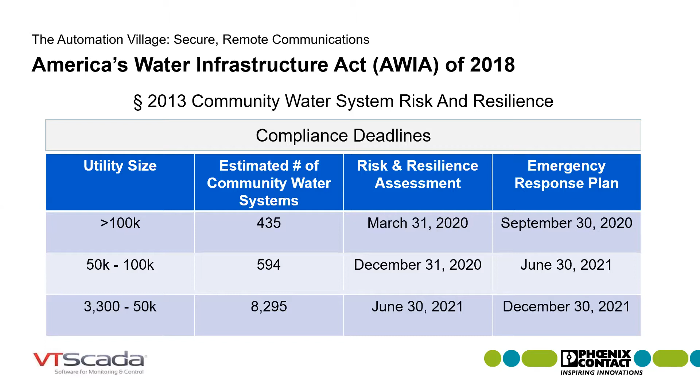But getting into the verbiage that we have as far as what AWIA actually requires, I'd like to highlight a couple of key definitions because this really comes into play. Resilience, that is the key word for our industry today.

And you see the definition as it's laid out in the legislation. I'll give you a simpler one. Resilience is how big of a hit can you take and how quickly can you recover.

The next key definition there talks about hazards. And this comes up in the conversation because we're talking about all hazards, whether that is a natural hazard or a malevolent one.

Obviously, we know what a natural hazard is, but the legislation does spell out some of these definitions so that we understand exactly what it is that we're trying to address.

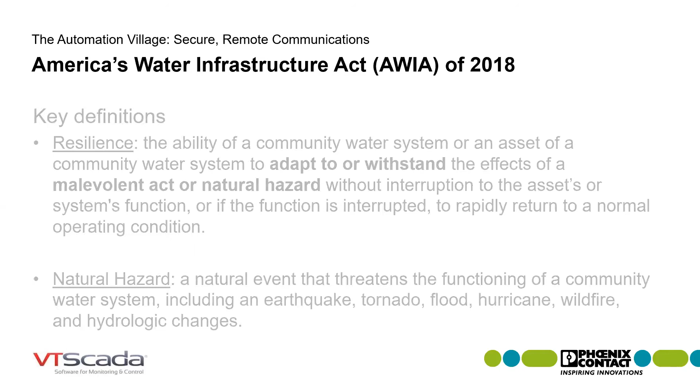In this next slide, we see some details around the risk and resilience assessment. Let's hit this first bullet point. The things I've put in bold are relevant to our conversation today. We want to assess the risk to a system from both a malevolent act, something that is intended, as well as natural hazards. The goal is protection of critical infrastructure, and whether it's a natural act or an intended act by a threat actor, we want to make sure the resilience of the system can hold up to that.

Our next point is we're looking at the resilience of a variety of things, but I've highlighted key features. We're looking at the resilience of electronic, computer, or automated systems controlling these processes, and that includes the security of such systems. For the first time, we've got specific requirements around our SCADA systems or process control systems, whatever term we use, but that's in play now. We're also looking at the monitoring practices of the system - how we determine something's going on, and how we respond to that.

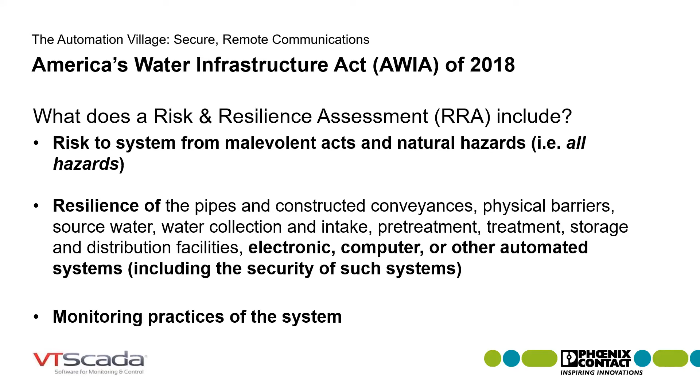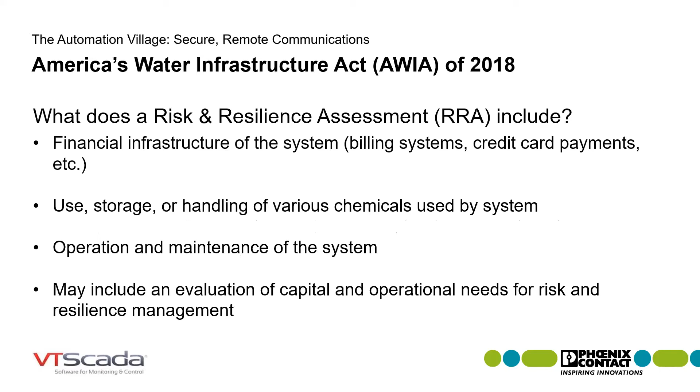In this next slide, we'll continue with some key points that come up. You'll notice they're not in bold, so I want to point out that is some of the real verbiage that goes into the legislation - not important for this conversation, but I thought it might be good for you to know.

Moving on to our emergency response plans - what's included there? You see some keywords: it could be strategies, resources, equipment, whatever that may be, but we're looking at how all these things play into the resiliency of your system. For the first time in legislation, it's looking at security, both physical security and cybersecurity. So that's why I think this conversation today is relevant. We now have specific directives for the first time in our industry relating to cybersecurity and what that means for drinking water utilities. You'll also notice another point about how we can identify equipment that can be used in the event of some type of hazard taking place.

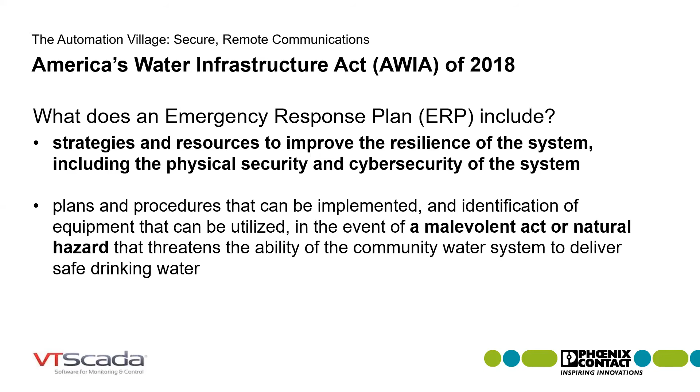On our next slide, again here's some key ones: what are the actions, procedures, or equipment that we can use to significantly lessen the impact? What they're really saying is, how do we detect that something's going on, how do we respond so we can mitigate that event as early and quickly as possible to minimize damage to our systems? And finally, what can we use in the detection of something going on that could impact the resiliency of our system and threaten the security of critical systems?

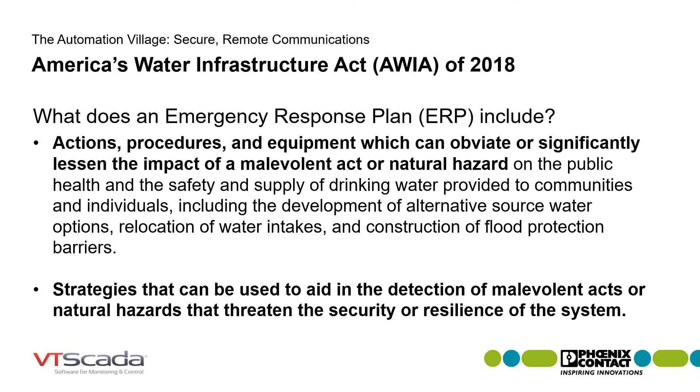Now, that's verbiage from legislation - very big picture, that may or may not mean much to any of us. I thought a better way to start narrowing down our conversation is to take a look at the NIST cybersecurity framework. That really has been driving the conversation on cybersecurity for critical infrastructure for the last several years. I like the core portion of the framework because it really helps define the key areas of cybersecurity we need to be focusing on.

So as we define the tasks ahead of us to reach specific goals, these five categories are: identify, protect, detect, respond, and recover. I think, as Miriam will tell you, nearly all of the conversation around cybersecurity focuses on the protection side, which makes sense, does it not? We're trying to prevent something from happening. But when you're dealing with critical infrastructure, we know things do happen, whether that's a natural hazard impacting our system or an intended attack. Either way, we've got to understand how we detect what's going on, how we respond, and more importantly, how we move to that recovery process.

And I think the key message I'd like for you to leave with today is we've got to start thinking about going beyond protection and into the other phases, because that really is what defines resiliency of our critical infrastructure, drinking water and wastewater treatment. So Miriam, I've been talking about some very big picture topics here, starting to bring that down into a few more defined categories around cybersecurity.

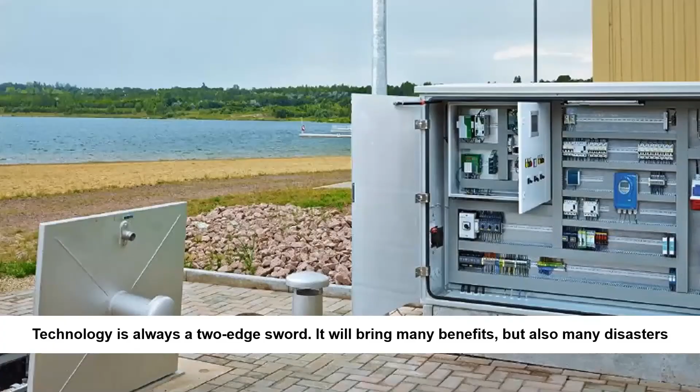Technology. So when we talk cybersecurity, this is where we spend most of our time, most of our resources. Everything we do around the first steps in cybersecurity, this is where we focus. This is where we're going to be focusing most of our time. However, my message here is exactly what it says: you have the technology that is working out there, however, it is a two-edged sword. It can bring many benefits, and that's why we want it, right? That's the idea of IIoT.

We have the technology, we have the devices that give us the data, but you need to properly use that technology, and especially the security controls within the different technologies, to be able to avoid any type of disaster.

We are going to be talking about Phoenix Contact technology in different layers, multiple levels within a plant, or the remote connectivity, in the next coming slides. And the last one is the risks, right?

How to manage risks. Creating a defense in depth strategy might sound overwhelming at first, but it doesn't have to be. So my message is: keep calm and just wash your hands. And what do I mean with this?

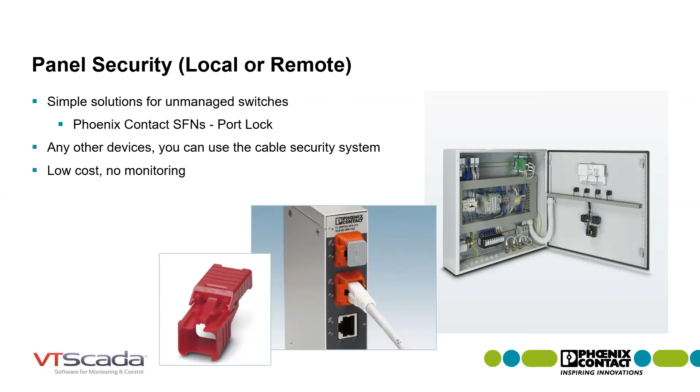Somebody has to have a secondary key to let you into a specific port if you want an engineer or technician to be able to connect physically to that specific panel, which I personally don't see the need for.

Now, moving on, this is where the meat of the cybersecurity information starts. Monitoring your network starts with a managed switch. You could use the embedded security features that the majority of managed switches already have, that is enabling or disabling the ports you are using or not using. So if anybody actually gets into that cabinet, you can just have the ports disabled and nobody will be able to log in or connect to that specific switch.

The additional security to that, because you could easily say well, you can unplug one of the other 3 devices in the case of this specific picture and just plug your laptop or your device in, is port security for MAC. You can tell that switch that only this specific MAC address is allowed to talk through port 3, which is great.

And if that happens, the great thing about managed switches is the monitoring. You can have that switch sending logs, sending network data, saying somebody just unplugged this and plugged in a different MAC address, and send it to some type of security SCADA monitoring system. That's where it's going to give you all the alarms and everything.

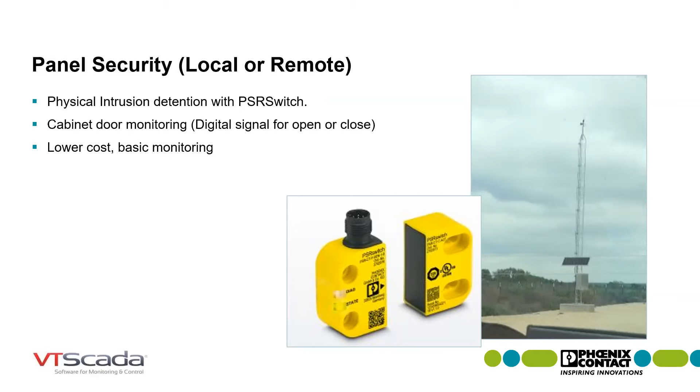And then additionally, going a little bit ahead, there's video surveillance. This could apply for local security at the plant level, inside the fence, and even if you want to move to remote sites, you can have some type of visual security system there too.

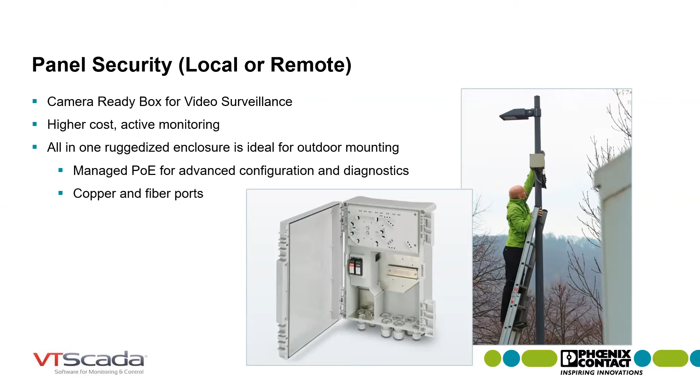Now, we talked about specific panel security and a couple of things you should or could be doing right now. What else can we do, and what other technologies are we using? How do we connect those camera ready boxes? How do we connect that safety sensor? How do we connect all of those devices that will send active monitoring data back into our central SCADA, or the specific PLC, or the specific process data back into our central SCADA or security operating SCADA site?

One of the technologies used the most is WLAN technology, wireless LAN. It's nothing more than Wi-Fi. It exists on the industrial side. However, the range fits within about 1,000 feet, so you have to think about it more like an in-plant type of thing.

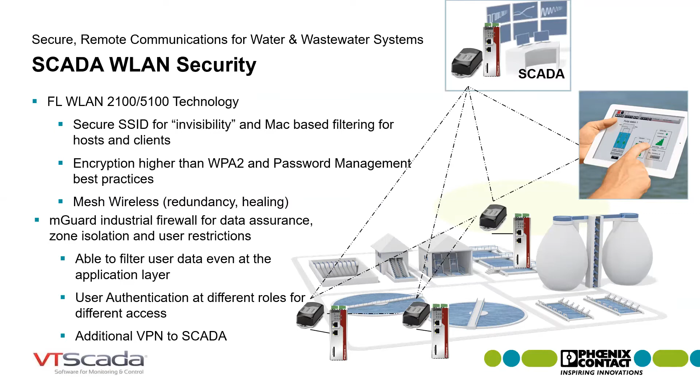Now, another technology that gets used a lot in the industry is trusted wireless. It kind of goes very close to standard WLAN, just a little bit further. The range is up to 20 miles, and we have ways to have flexible network structures, like point-to-point, star, or repeater.

The idea is to connect those more remote sites with some type of radio, trusted wireless radios. It self-organizes and self-heals, which brings resiliency. So if one radio communication goes down, the other one allows you to pick it up because it's just going to go around it. And it is hot swappable.

It's proprietary frequency hopping technology, or you can get a unique ID for that mesh or communication in the wireless via a config stick, what we call a conf stick. It's an additional part number. You plug it in on all your devices, and they will have that unique network ID to connect and talk to each other.

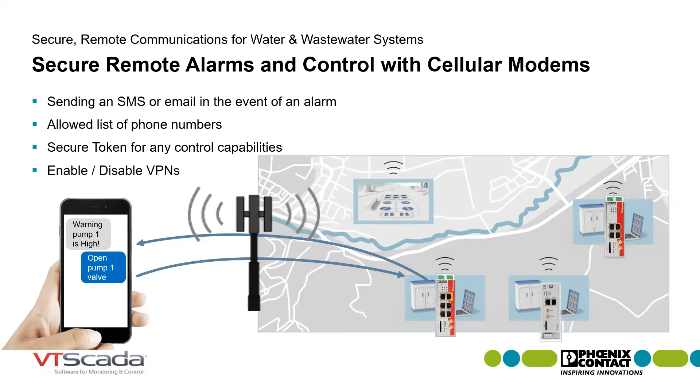You can also use the VPN for the cellular side to come in, all of these working together. You can even use the text message capability to enable and disable the VPN of those remote sites. So if you don't want it enabled at all times, you can have it disabled, send a text message—hey, turn on my VPN—turn it on, send the data back to SCADA, then turn it back off whenever it's needed.

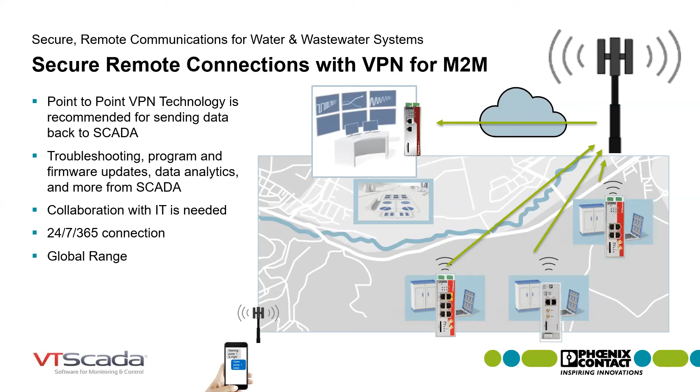Now, this is what we call machine-to-machine communication. What happens when you need users to connect in, to troubleshoot, either system integrators or vendors that need to come into those remote sites?

You can use a service like the MGuard Secure Cloud that we offer. It's very nice and granular because it provides the configuration, the tunnel, a unique encryption, a unique certificate for your specific account. Then, moving on, you can have user restrictions, so only the system integrators will be able to see the specific equipment that they provided. You can even be granular down to the device level—they can only see the specific device you want them to see, which is pretty nice. It makes it a little easier to manage and automate.

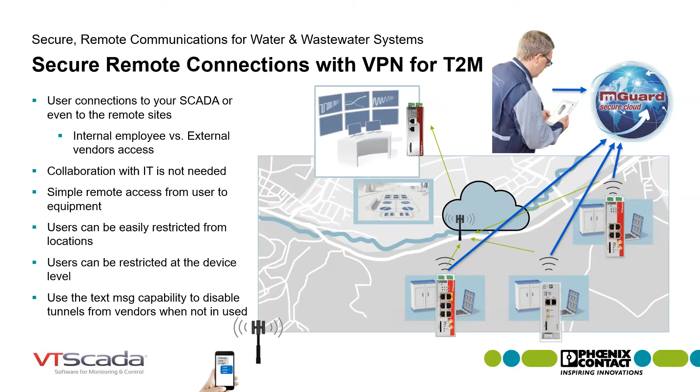Now, network resiliency, right? Network redundancy. How do you do network redundancy within these types of applications with really remote sites? They might be within wireless range, like Ethernet wireless range, but I also want redundancy. You could use the same cellular modem with the radio, or with trusted wireless radios.

As you can see on the MGuard device, the red line across, it has a couple of interfaces. A WAN interface will be, for example, your wireless interface—that's what sends the VPN back to SCADA. So all the VPNs, either to SCADA or to the remote user, connect through there. But if that radio has some type of miscommunication, the cellular connection will be allowed to kick in as redundancy and backup into your SCADA, back into your plant, again increasing resiliency within that remote site.

Now, something nice that we have to offer, and actually pretty popular with everybody in the industry, including system integrators—we use it ourselves when we need remote support. This is what we call the M2M box, remote connectivity in a box, ready to ship. It's one part number, depending on the application and what you need to do, with different devices.

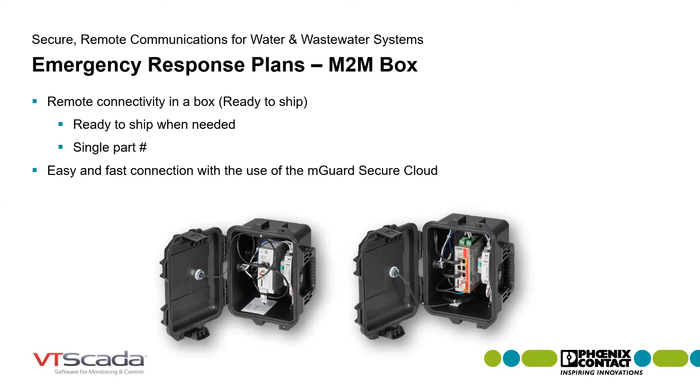The last thing to keep in mind is that you're not alone. You have trusted partners you can work with, and even at the vendor side, like us, we can work with your trusted partners, or work directly with you for all your industrial security and networking services. We have an engineering services team that can handle evaluation and planning, implementations and documentation, following security standards, maintenance and support, awareness seminars, and product training, depending on your exact requirements and applications.

To close my point, remote connectivity in water and wastewater is not a new term. Because of the nature of the decentralized infrastructure, we always have to find ways to bring the data in. Now time has passed, and we need to make sure we make those connections more secure and more reliable, because the entire operation depends on it.

Lastly, to close this session, this year has shown us that things happen. They can easily disrupt the ways we run our lives and businesses, and there's no real way to control them. However, they can be managed. My point stays: control what you can with the ideas I just provided, but manage what you can't. Active monitoring is part of managing what you can. Risk management is part of managing what you can. Do not let any malicious act or incident affect the availability, reliability, or overall resilience of your network. So take security as a holistic approach. Follow the guidelines provided, train employees, and collaborate internally to apply these multiple layers of defense. Know that you're not alone.

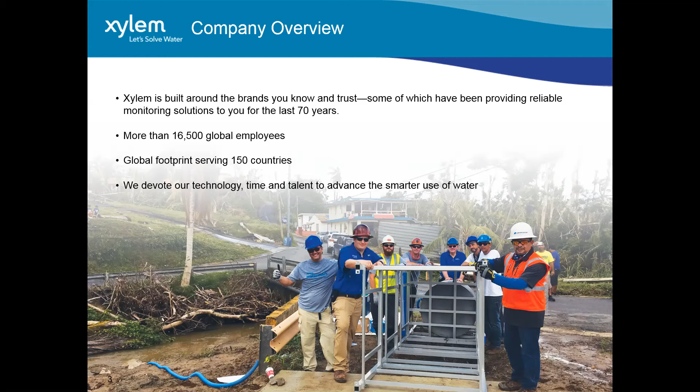Okay, so if we look at Xylem as a company, we're built out around almost 100 different brands located all over the world. We've been doing monitoring solutions for 70 years. We get involved in the treatment of water, the transport of water, the dewatering of water, believe it or not, analytics around process measurement, and a lot of what I'll talk about today in the outdoor water space as well. We've got roughly 16,500 employees globally, in approximately 150 different countries. So we're definitely a water-focused company. That kind of gives you an overview of Xylem.

So today, again, we'll jump back to autonomous and surface vehicles, and I just want to cover the different types of vehicles. We have unmanned aerial vehicles, called UAVs, and their primary purpose is to do imaging from airborne missions and routes. That can involve things like cameras, but primarily technology like LiDAR in order to characterize the topography and things currently above water that influence the specific watershed.

Next, we'll look at autonomous surface vehicles. These ride on the surface of the water but do a lot of subsurface measurement from the surface. One advantage of a surface vehicle and an aerial vehicle is you can get data during your mission through wireless connectivity while the mission is being conducted. Then lastly, we'll talk about autonomous underwater vehicles, which primarily reside under the water. One great advantage of having an autonomous underwater vehicle is not only is it unmanned, but it's able to undulate through the water column, giving a much more three-dimensional picture of things like water quality and other point measurements that can't be done from the surface. So those are the primary three vehicles we use to characterize watersheds.

So what are the primary vehicle functions? Regardless of whether it's a surface vehicle or an underwater vehicle, for the two non-aerial vehicles, one of the primary functions is water quality. We can do up to 21 different parameters, things like temperature, pH, salinity, conductivity, chlorophyll, colored dissolved organic matter, all kinds of water quality parameters we can collect while underway and geospatially tie together for a complete overlay of that data, which is really difficult to do when looking at discrete or spot measurements with these instruments because it varies so much over such a small area.

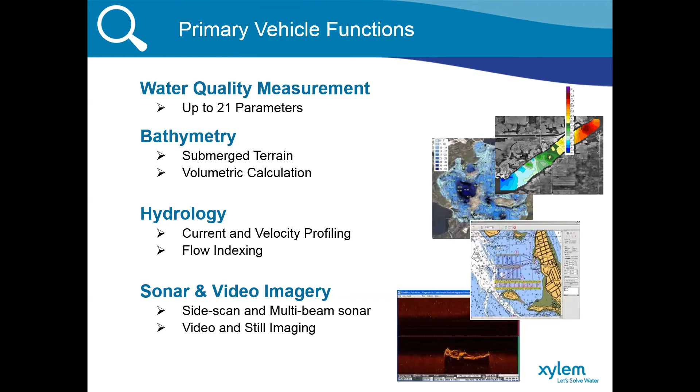Okay, so the value proposition of conducting these surveys, as we talked about at the beginning of the presentation, is the efficient characterization of a watershed. What I mean by efficient is you take a lot of the expense of having crewed vessels and survey time and put that into an autonomous vehicle that can be programmed by a single person and operated by an unmanned vessel. It covers that large spatial area versus trying to do daily discrete measurements or other ways of getting data that are much less effective when you're quickly trying to characterize a watershed.

And again, that leads us into the effectiveness. Because we're able to collect this amount of data and accurately correlate it geospatially into a file, we can visualize that data both two-dimensionally and three-dimensionally throughout the different missions, and throughout seasonal changes we can quickly assess, as well as after significant storm events. So it's an effective way of collecting a large amount of data spatially without involving a lot of humans and a lot of expensive boat equipment, insurance, etc.

So what are some of the things we can find? One of the primary things we can find is sources of non-point source contributors, examples being leaking septic tanks or agricultural row crop runoff, and then point source discharges, which are the effluents from designated facilities that have a permit to do so, and that we know about. So these are point source and non-point source.

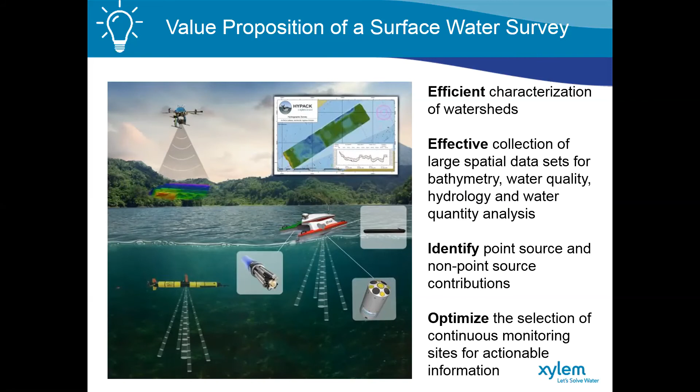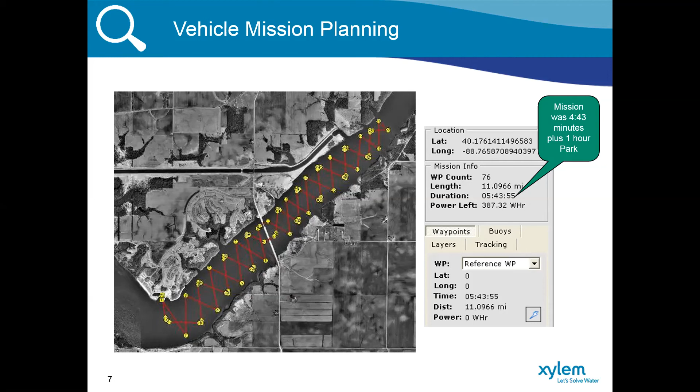And this is actually a tributary. If you look at the upper half of the satellite image here, you can see a conduit or canal. That's actually effluent cooling water from a nuclear power plant, and the discharge into this tributary ultimately discharges into a much larger lake.

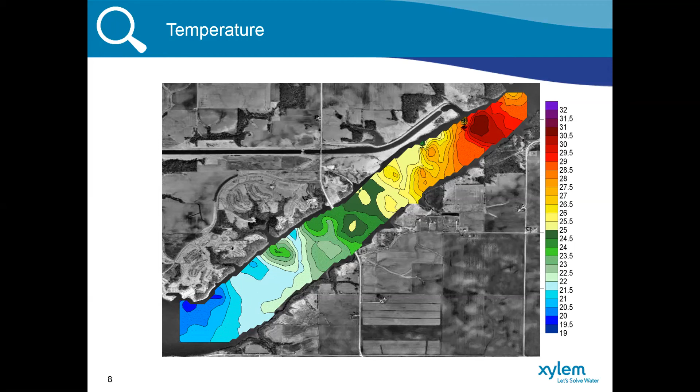So what kind of data did we get from this mission? We got some great temperature data. You can see in the upper right-hand corner how warm the water is at the discharge point, and then as it begins its entry back into the lake, you can see the mixing with the ambient temperature of the lake water and how that spreads out. This would be very difficult to do if you just put one sensor at the mouth and one at the discharge point. You wouldn't completely characterize the distribution of that temperature stratification in this tributary.

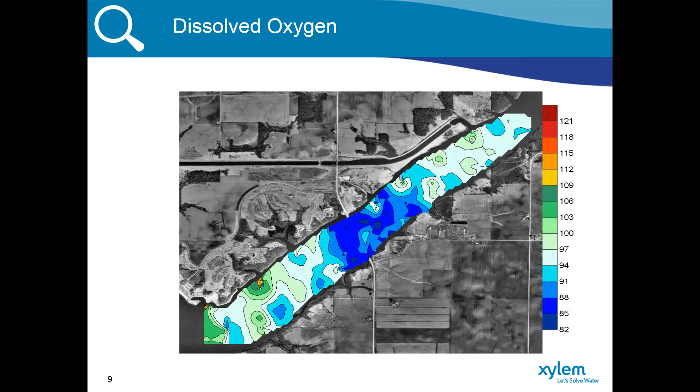I want to jump back to the SCADA interface. If this were any nuclear facility, they'd more than likely be required to measure temperature at several different locations and often tie that into their SCADA system, so they have that historian type data they can report to their compliance organizations and consultants, et cetera. Another example of how we use it with electricity is hydroelectric.

We spoke about dissolved oxygen. Believe it or not, when you push water through a hydroelectric facility, because of the amount of darkness and the duration it's in that dark period, it actually reduces the amount of dissolved oxygen at the effluent versus the influent. So they're often required to measure both influent and effluent dissolved oxygen and temperature for hydroelectric to make sure they stay within compliance, and that's often tied to SCADA systems as well.

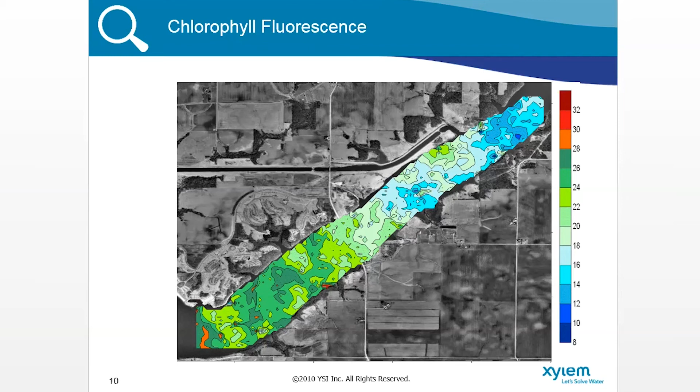So we're going to jump to another watershed. This one's really interesting—Cardiff Bay, just south of Cardiff, the capital of Wales in the United Kingdom. This construction project goes back to 2000, but basically they created a dam and a 500-acre freshwater lake. This used to be an estuary with brackish or saline water, and they dammed it up and created a nice 500-acre freshwater lake for recreational use and all kinds of good things. It literally took an act of parliament to pass this. I'm not exactly sure how many billions of dollars they spent, but this was a major undertaking.

I want to show how we used survey vehicles to precisely locate some of these buoys that are also tied to a SCADA system. First we did a bathymetry survey after construction of this dam, which also includes 3 locks operational for recreational vessels 24 hours a day. You can see where the deeper water is—when you open these locks, it creates almost a river inside the lake. You can see the difference in water depth here versus closer to the shorelines. This is where the majority of saltwater infiltration comes when you open the locks to allow recreational vessels in and out. You can see we strategically placed several buoys along this deeper trough as well as on the outlying areas.

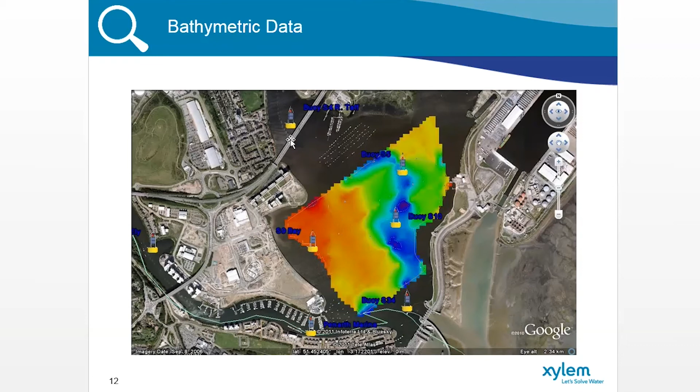This is just a 3-dimensional picture of bathymetry, or depth.

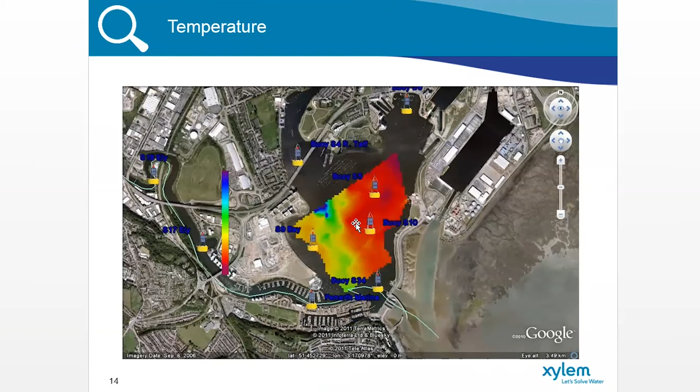If we look at temperature, you can see that the temperature is much warmer in that deeper trough where you have the majority of the flow, because we're actually pulling in water that's warmer than the ambient temperature of the freshwater lake every time we open that lock to allow vessels through.

And then lastly, I want to talk about conductivity. Conductivity was actually converted into salinity in this case, which is really what they wanted to look at—what happens when we bring saline water into a freshwater environment. What they did was put sumps or pumps at the bottom of this lake to draw out the saline water, tied to a SCADA system and a whole operational facility.

So each time we open up one of the 3 locks, or all 3, that saline water stratifies low in the water column all the way to the bottom, where it's extracted out and discharged back into the other side of the lock structure. So what we're doing is protecting all these freshwater aquatic species and plants from too much saline infiltration. You can see why this is an ongoing and very expensive process, to create a freshwater lake that was actually designed originally by Mother Nature to be an estuary.

Next I want to look at how we look at those discharge measurements I mentioned. In other words, how we look at the quantity of water flowing through a river like the Mississippi River, or any big river, where we can actually do those transects and get total gallons, or millions of gallons, or cubic feet per second, or any type of discharge measurement information we want.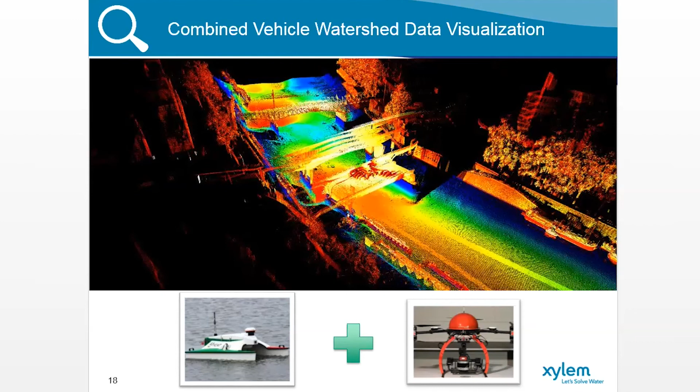So now I'm going to jump to one specific vehicle because I've got quite detailed information on this. This is probably our most versatile vehicle—that middle autonomous surface water vehicle that can also be remotely operated.

If you look at the brains of it, we're running an onboard Windows computer, and then we have a separate computer strictly for navigation. So one computer is designed strictly for collecting data and geospatially referencing that data, and another computer is designated strictly for safe and accurate navigation. We've also got a water quality sensor that we call the YSI EXO, which is one of the Xylem brands.

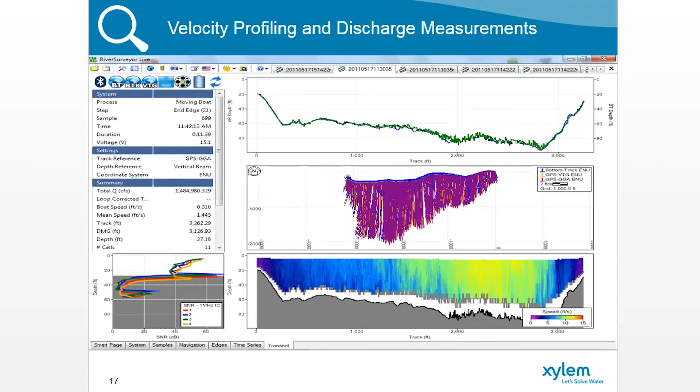We've got a SonTek, what we call the HydroSurveyor M9, which is the exact instrument that gave the discharge data I showed on the prior slide. We've also got an Imagenex Yellowfin side scan sonar, which was the underwater imaging device that showed the submerged objects.

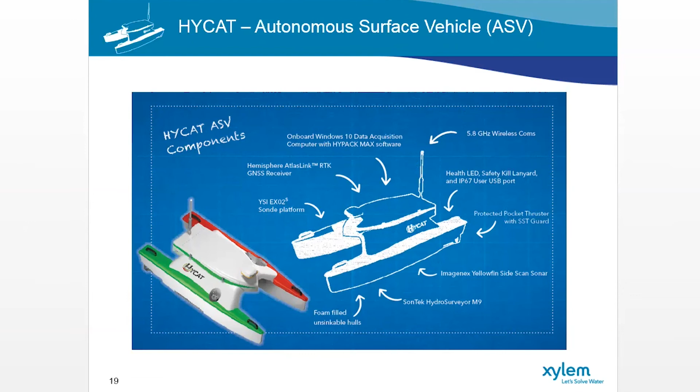And then some really fancy telemetry. We've got 5.8 gigahertz comms between the computer interface and this vehicle that can be run while it's under a mission, but you can also actually change the mission while underway too if you see something interesting. Again, one of the advantages of a surface water vehicle.

So just again, a product overview. This vehicle was created between YSI, which is a Xylem brand, and SeaRobotics, which is a great company with a long-standing reputation in autonomous boats and vehicles in general. One reason why I want to mention that is you can see one of the bullet points here about mature autonomy. This is not something you learn in a week or even a month.

This takes years worth of fine tuning to have a truly well put together autonomous vehicle. There are a lot of things to factor in, like how the propulsion's controlled, the turning radius, the stability. All this was done in partnership with SeaRobotics.

We talked about the water quality, the bathymetry, the current profiling, but the main feature of this vehicle is it's under 6 feet in length. It can be carried by 2 people, and it can be put in the back of a traditional full-size pickup.

Another distinguishing feature of this vehicle is it's single software driven. So the same software we use to set up the missions is the same software we use to operate the vehicle remotely, as well as display and visualize the data, not only while underway, but post-mission. Again, that's the mature autonomy that SeaRobotics has learned over the past decade or more.

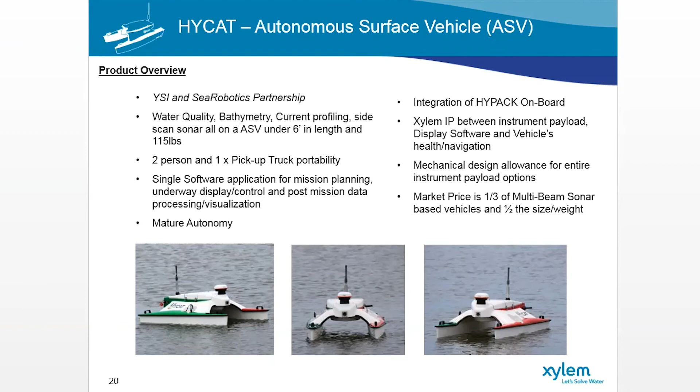We talked about HYPACK, which is our survey grade software, and the integration of that single piece of software. And again, it's actually much less expensive than some of the larger vehicles, and about half the size in weight. So it's perfect for the type of applications that I've shown so far.

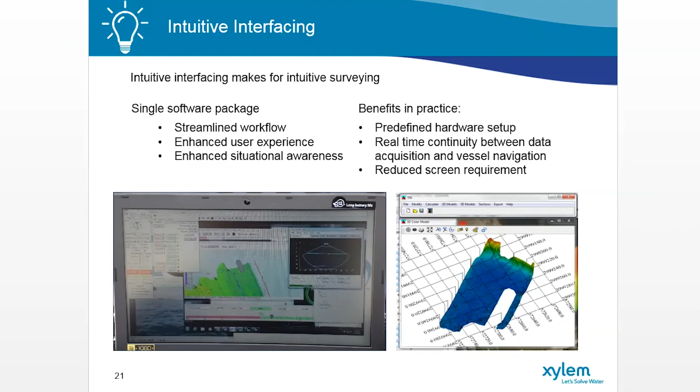Intuitive interfacing — I don't want to beat this to death, but if you ever had to use an autonomous vehicle, it's all about ease of use and the learning curve. This obviously takes a little more than a quick start guide, but somebody that understands basic navigation and point and click software can learn and operate this vehicle within a few days. Or often they would contract somebody like Xylem or another survey company to conduct the survey for them using these type of vehicles.

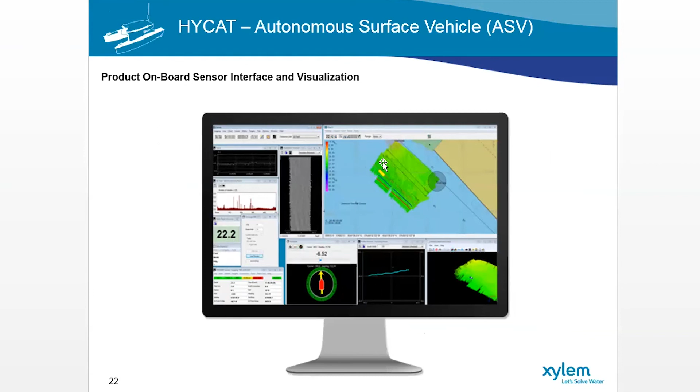And again, just another quick picture of some of the visualization and interfaces you get while the vehicle is underway. This is some of the navigation software, this is some of the vehicle health information, and this is some of the actual data being displayed — again, all in one piece of software.

So let's just quickly talk about the 2 fundamental types of surface vehicle hulls. We've got a planing hull, which is kind of like a sports car — designed to go at fast speeds and fast currents, but it suffers a little bit on the stability part. When you've got a little bit of wave action, there's a lot more heave and pitch, rolling type of thing.

And then there's also the displacement part of it. When you look at something like a catamaran, you can actually load up for the overall length of the vessel. You can put a lot more weight on the vessel with a lot more stability, and that comes into play when you look at things like bathymetry data collection. That stability, that vehicle being stable while it's underway, is important — that's the reason why we chose a catamaran versus a monohull.

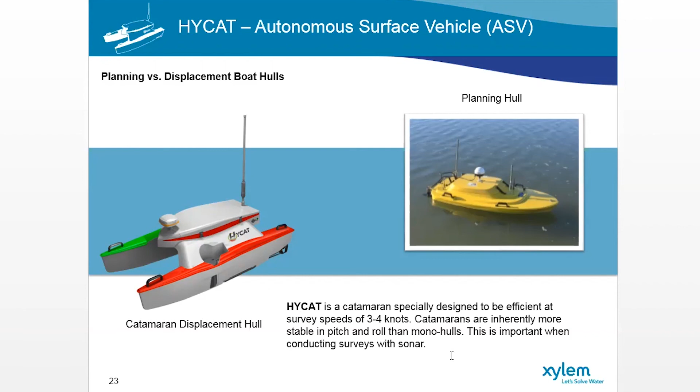So, next slide. I gotta click it.

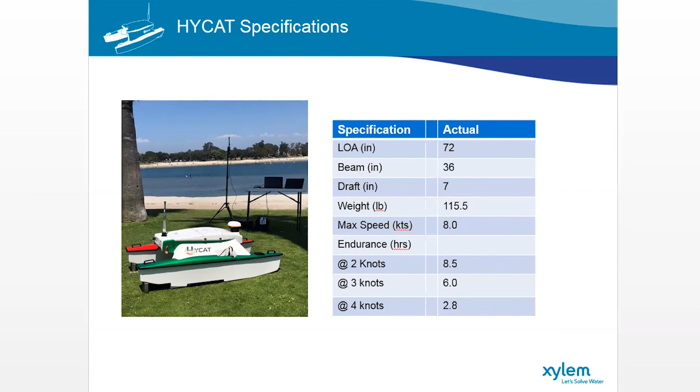So now I'm going to jump to some of the considerations for when it's time, when you've located the proper location for your monitoring site. And that could hopefully be based on some of this survey data or existing baseline data.

Once you've chosen a location for the site, the first thing to review again is your monitoring goal. Is this a compliance project? Is it a project where we're using it to automate or control something? Is it a remediation project? Is it a mitigation project? But ultimately, identifying your monitoring goals first.

That drives not only the location of the site, but what equipment do we use. Do we need water quality equipment? Do we need open channel flow, level, meteorological, etc.? So that's where we choose the different equipment for the site.

And then we move to instrument preparation. Really that's setting up the instrument for the units of measurement we would like, the parameters we would like, and then interfacing that with a data acquisition system.

The next step is deployment. That's where we mount it, how we reference it. Are we referencing it to an elevation? Are we referencing to a distance off the bottom? Are we trying to capture something, water quality at the surface as well as at the bottom? This is where deployment of the actual sensors comes into play, and also securing the sensors, especially in flashy stormwater situations or high currents.

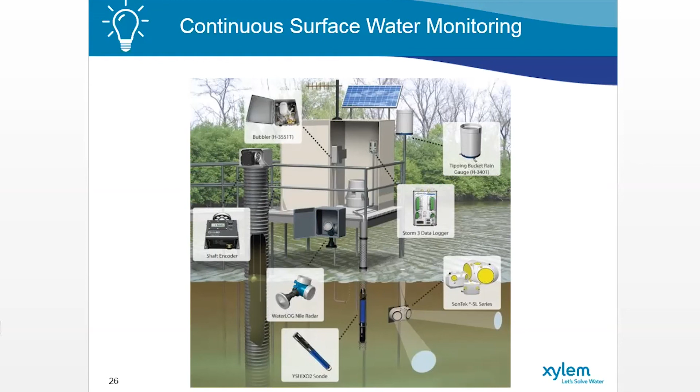In this example, very common with reservoir programs for municipalities, we have the ability to take water from different intakes depending on the quality of the water. If we had a major rain event a couple days ago, we may have turbidity that's settled somewhere in the middle of the column, so we may choose the upper intake. Or in the evening, we might have a low dissolved oxygen issue down deep, and decide to take water from the upper or mid intake. If we had a rain event happening currently, we might have turbidity at the surface and decide to take from the bottom intake. You can see the advantage of being able to look at the entire water column.

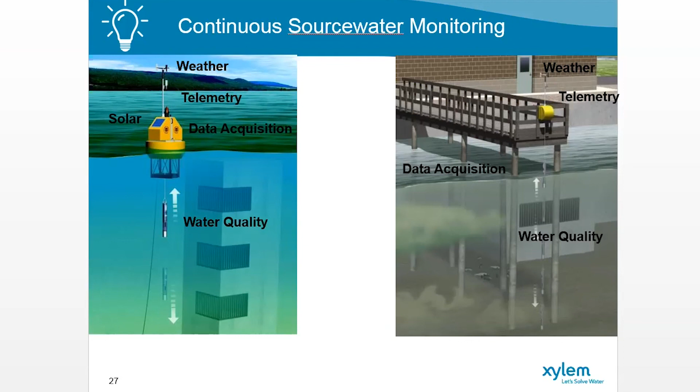If we take a deeper dive into exactly what components are on that floating or fixed platform, again we look at things like rainfall. We can also look at weather, because that can move water quality, whether it's wind driven currents or the direction of that wind. We measure barometric pressure, relative humidity, and air temperature, all done with these combination weather sensors. We've talked plenty about water quality - these are some of our flagship water quality instruments.

We also do measurements like photosynthetic active radiation, which is just the amount of available sunlight. It's important to look at because cloud cover can change quickly, and it's a very site-specific measurement. It helps us do better predictive analytics to anticipate a potential problem like an algal bloom. So if we had a significant storm event, a significant amount of nutrients in the water, and then continuous sunlight on a warm summer day, having a PAR sensor could help mitigate or even prevent an algal problem and provide that information to a municipality or water utility.

Again, I'm showing how we connect all these sensors to a data acquisition system and ultimately to a SCADA system or SCADA historian database. So Chris, I'm wrapped up here.